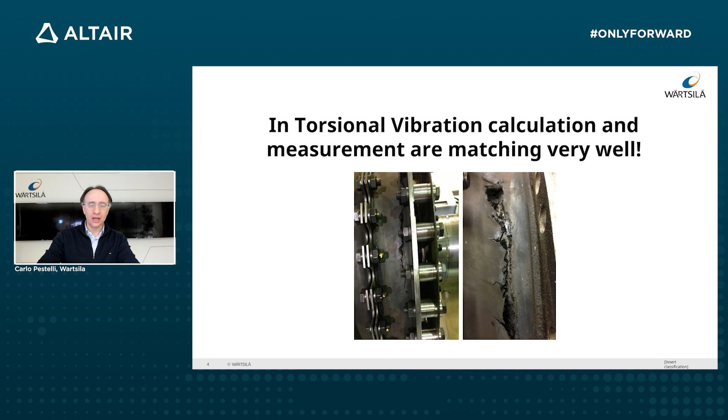So, as I said, I'm going to talk about engines and a specific component of the engine that is the crankshaft. The most important characteristic that we have to calculate in the shaft design is the torsional vibration. And I can assure you that simulation models reached such a high precision level that simulation and measurement are matching very well. But, you know, in real life, strange things happen. So let's think about what we can do about it.

First of all, as engineers, we always have to deal with approximation. For example, we work with theoretical material versus real material. We deal with perfect excitation to apply to the system versus real complex excitations. Then, for noise and vibration, we typically work in frequency domain, and it is fine most of the time and is computationally very fast, but sometimes to catch some specific phenomena, we need to go to time domain.

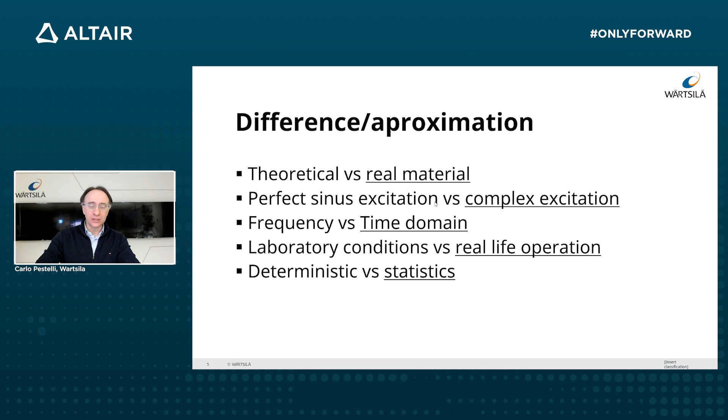Then, most obvious, usually we validate components in laboratory controlled conditions. That is very different from real life operation of our systems. Another interesting approximation is that we usually think in terms of a deterministic approach. We think that what we apply to the system is reality, but the reality is more statistical than deterministic.

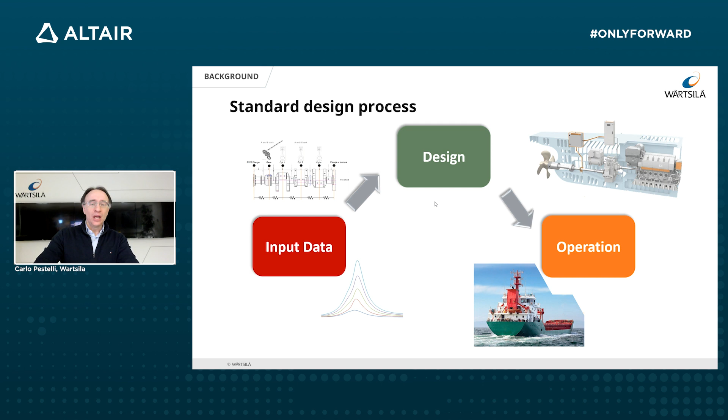Okay, so probably last century's design approach was to collect some data that we suppose are the worst conditions that could characterize the system, and we use this information to design, and then the system will go to operation, in this case, a ship. So let's start to burn our ships.

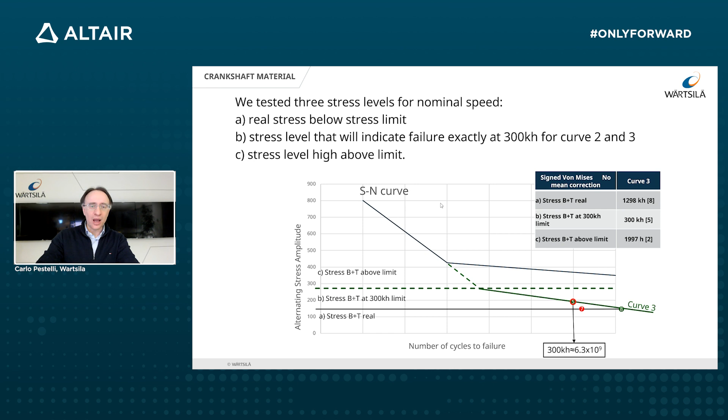First one, regarding the material, the most simple approximation of a material is the resistance to stress. Okay, but what if we could model the material to have a damage accumulation model? This will open a new scenario for us. Then, second one, if we have a model that can accumulate damage, we could look at damage accumulation instead of stress level on a component.

And this is much more informative because simply the damage accumulation, the fatigue phenomenon, is exponential. So as soon as there is a little bit more stress, there is much more damage. So this approach allows us to look at the more stressing conditions.

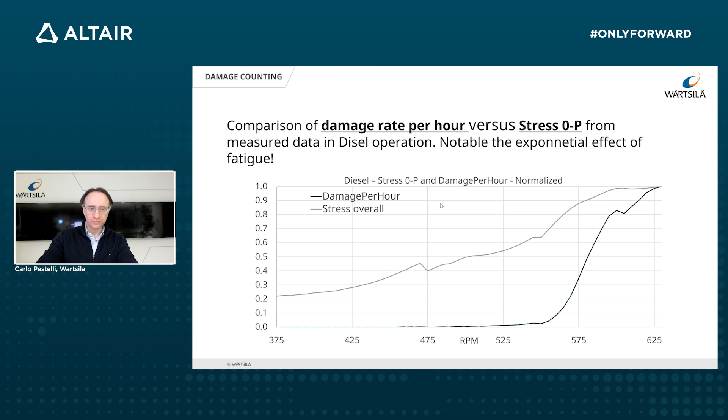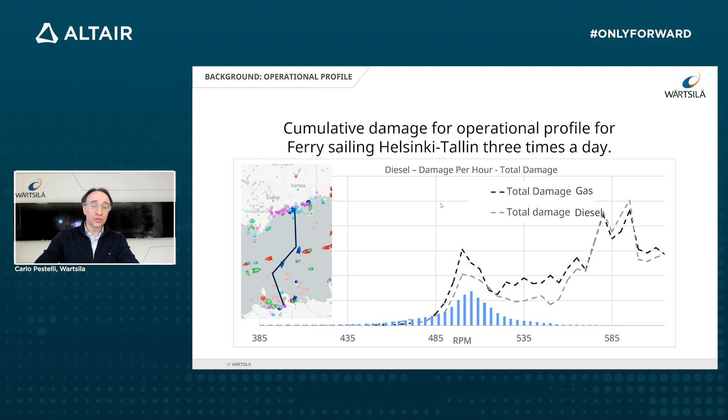Then let's suppose that we have a ship that is a ferry going back and forth between two cities. So we collect statistics of some ferries, and we see in which conditions they operate more statistically. So we can add this data to our design approach. And if we do that, we see that it opens new conditions that may be more stressful or more interesting to look at in the design phase.

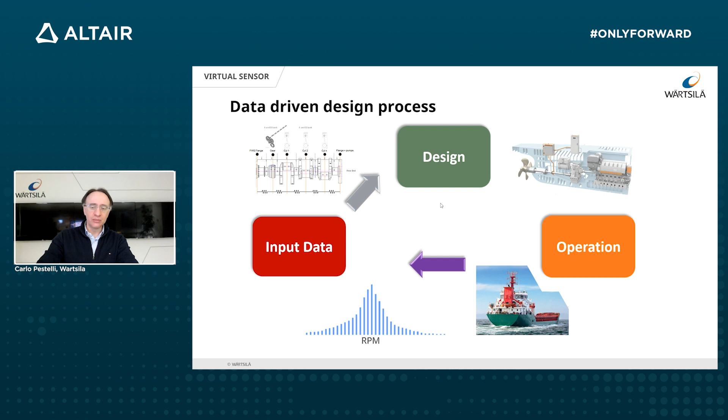So what we do today is the so-called data-driven design process. So we design based on information collected from the field of similar ships and similar engines. So then what we can do further is think about which more data we can collect, and what we can do with this data.

And then comes a concept that you might be familiar with. It's called digital twin. Okay, there are various interpretations of this wording. I want to specify my own. So, a digital twin is a simulation model of a physical twin and has two important characteristics. The first one is that simulation time is even faster than reality, so that it can be more useful. Okay, so this is not a simulation model that takes 1 hour to calculate. It needs to calculate what is happening faster than how it's happening.

The second characteristic is that it has to exchange data, at least from the physical twin, and even back to give some reaction. So these are the two characteristics that for me define a digital twin. With this approach, we are thinking of, let's call it, a virtual sensor. So in fact it is a digital twin application.

So a virtual sensor is the idea of what if I could have a sensor where it's very difficult to place a sensor in a commercial application. Maybe in a laboratory you can do it, but in real operating conditions, it's too complicated or too expensive or not lasting so long. So can we calculate that information based on other information instead of having a sensor in that place? That is the concept of a virtual sensor.

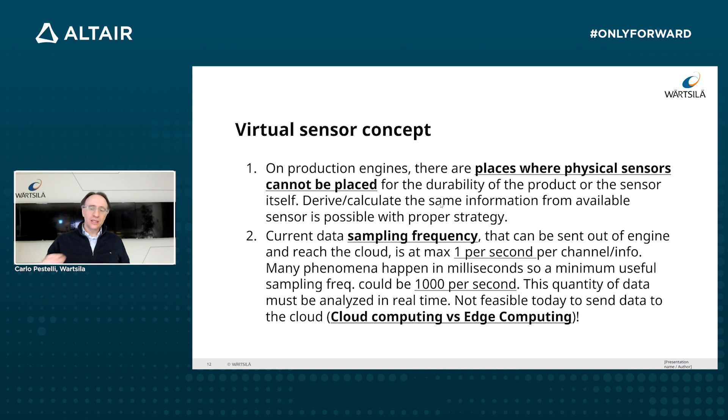So to allow that, especially noise and vibration, since we need a very high frequency sampling rate to catch the phenomena, we would not be able to go for cloud computing. So we could not transfer our data fast enough to the cloud and have a computational model in the cloud. The best way is to do what is called edge computing. And that's calculation right on the edge.

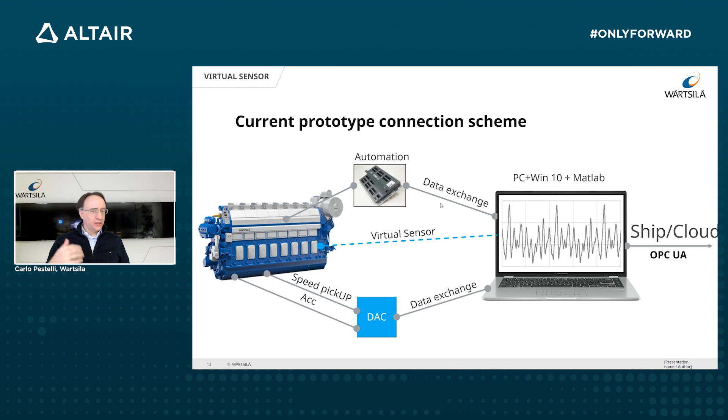Very simple. So what did we do? We took a computer with a simulation model on it, very simplified, very optimized. We are acquiring real data from our automation system, information that is fed real time to the model, which calculates the information. Of course, we can acquire also other information for comparison and understand deviation of the model and many other things that we can do.

But in this way, we can place virtually a sensor everywhere in the shaft. Okay, instead of just one sensor, we can have hundreds of virtual sensors that are calculated real time or even faster than real time. So it's more useful information. There can be more strategies to do that. For instance, acquire the combustion curve to apply the load on the cylinder. In this case, we adopted another model to simulate the combustion as well.

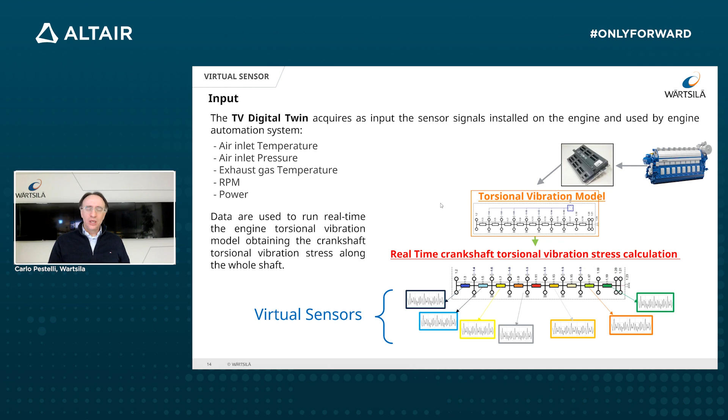So what can you do now that you have this information? The stress everywhere in the shaft. Using the accumulation damage model that we were talking about before, what we can do is to look at how the shaft in every single point is accumulating stress. So the real operation conditions, some misfiring condition, some overpressure happening, some strange condition that happens on ships during operation, are recorded and the effect is added to the model. So this is just one example. So condition maintenance could be an example of how to use this digital model.

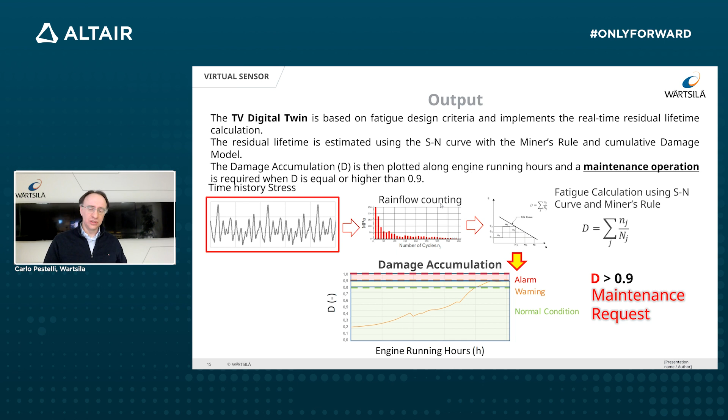Is this reality or fantasy? Now I show you a video. We are comparing now calculation to measurement. This is a ship that is doing an acceleration and the engine is going from 300 RPM up to, I think, 600. And as you can see, it is going through resonances. And below you have the comparison in time domain, so strain gauges versus virtual sensor. And I think you can see with your eyes that today this approach is a reality.

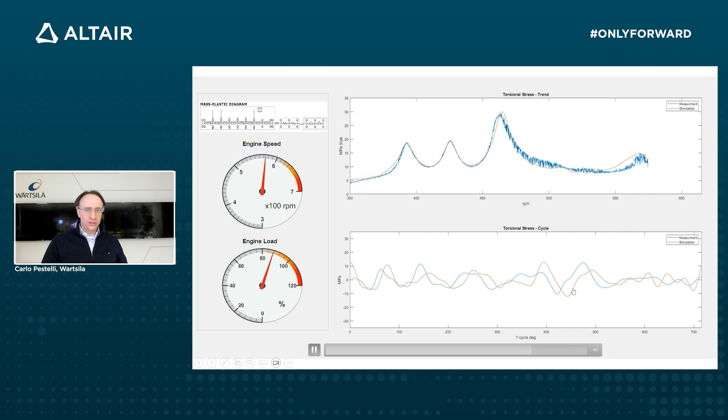So now I'm just talking about calculating the value, not how to use it. Okay, as I said, you can use it in a simulation model or in a reaction way. Think, for example, that when the engine was passing through a strong resonance, we could adapt the combustion in real time when the sensor was sensing such high stress, and change combustion and destroy this excitation. Okay. So let's go a little bit forward.

So this virtual sensor concept, application of the digital twin, is also a nice way to think about what has changed. What has changed is that the job of an engineer, that usually was finishing in the design stage, in the validation stage of a system or machinery, now is living with the engine or with the machine forever. So I think this could make you feel very proud that what you do is not ending in the lab. And this is clearly giving value to the customer.

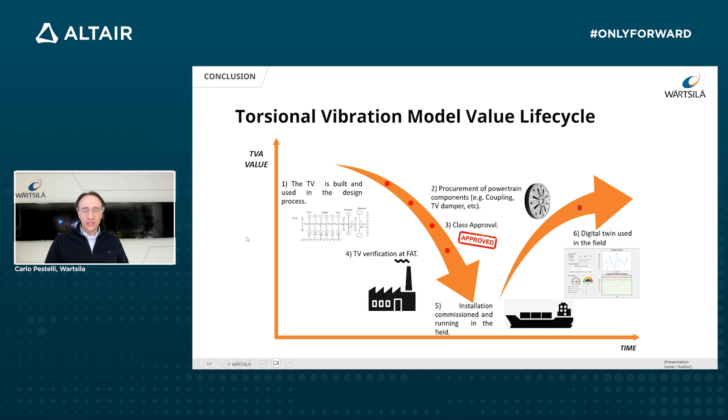For the business model there are infinite possibilities of how to apply this and give more value to the customer. Could be predictive maintenance, could be optimization in real time for particular situations, you name it. And I know we're discussing burning ships. So think of a completely different way of design. What we could look forward to is what we can call adaptive design. Not anymore design based on statistical data, data-driven design, but create a design that adapts in real time to the condition. So this is what is possible to start to think about today.

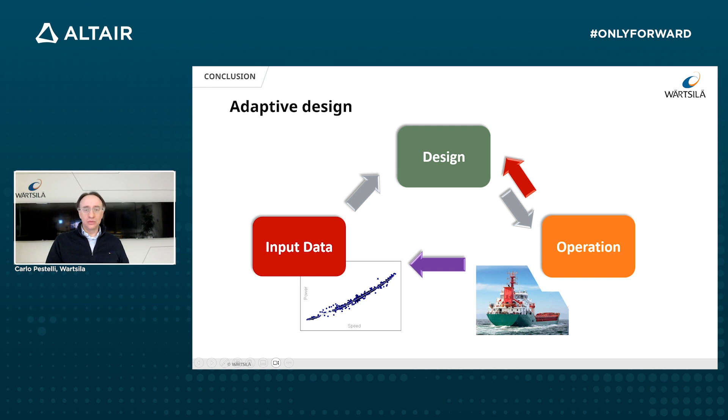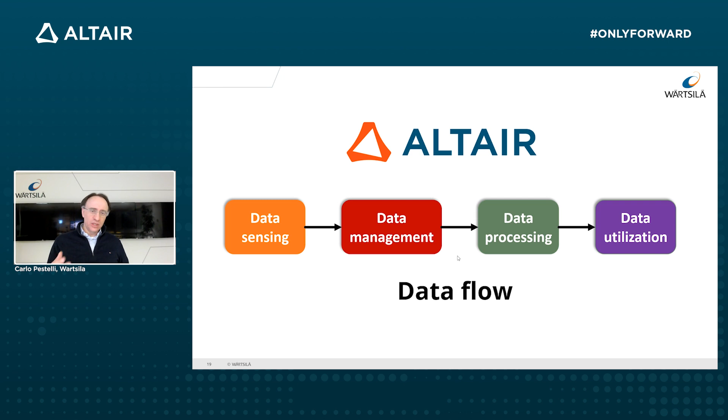As you can imagine, on the PowerPoint it could look easy to do, but you have to deal with a lot of data. First of all, you have to measure data, acquire data, you have to organize data, you have to store data, you have to process data, and you have to use data. So in all this long data flow, I noticed that Altair can provide you a solution for every single step. So that's why I'm very proud today to give this presentation to you.

So just a brief recap. Did we burn some ships today? As I was discussing before, we can increase complexity today. So we don't have to think to keep the stress level below allowable stress, because now we can even overstress a system, but think in terms of time of continuous operation instead of hoping for infinite and then something strange happens. So as I said, we can go from looking at stress to looking at damage. And this, I think, will change a lot of ways of thinking and possibilities of what you can do.

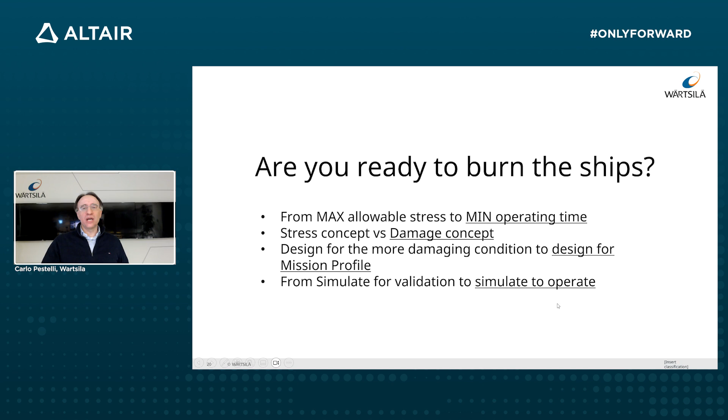Once upon a time, we were designing for the most damaging condition. Now we can design for the mission profile. That is happening already in aerospace industries, for example. But I think the last line is the most fascinating. So from simulating for validation or optimization, we simulate to operate. So we simulate what is happening in real time to adapt and optimize the condition and the reaction of the system to it. Okay, that was all for today.